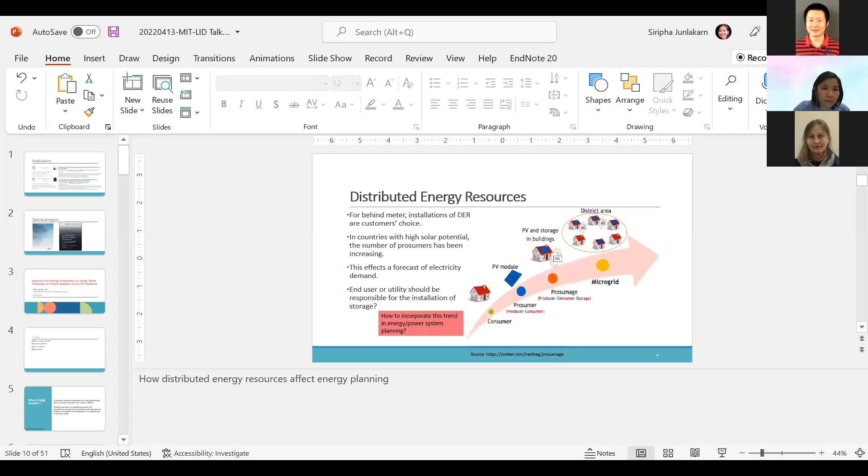So just to briefly introduce myself, my name is Siripha, and you can call me Pui. Like Thai people usually have a nickname, and Pui is my nickname. I'm a researcher at the Energy Research Institute at Chulalongkorn University. My focus right now is working on economics studies of solar PV, solar distributed PV, and how to support and promote using solar PV in Thailand, as we have high potential for solar. Most of our work here is about solar PV.

And also I'm interested in energy scenarios. I've worked with some projects, for example, economics and risk for the power system for the ASEAN grid. As our neighboring countries here, we have a project called the ASEAN power grid, trying to connect the ASEAN countries.

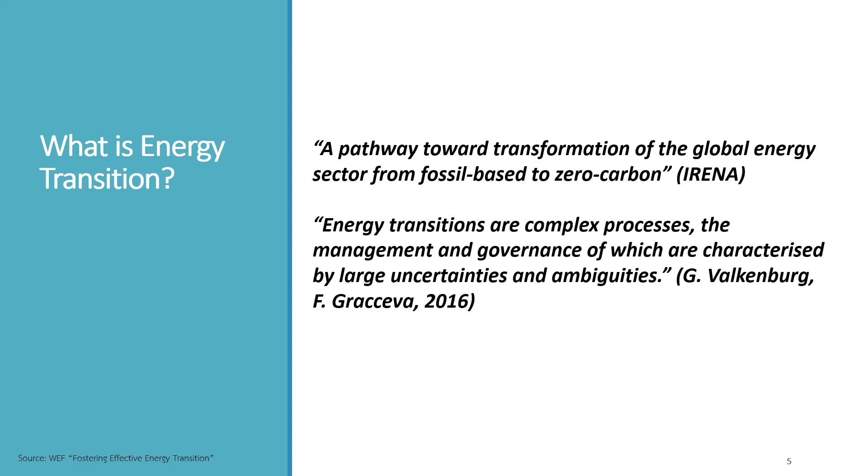So, what is energy transition? According to IRENA, energy transition is the pathway of transforming the energy sector from using fossil fuels to using more clean energy, which leads to reductions in carbon emissions. As energy transition is a process, it's complex since it's related to many sectors, so the management and governance of it are full of uncertainty and ambiguity.

So what are the drivers that bring about energy transition? The main drivers of energy transition are pollution from burning fossil fuels, and also climate change from greenhouse gas emissions. The energy sector is the main sector that contributes to that emission. The last driver is sustainable development.

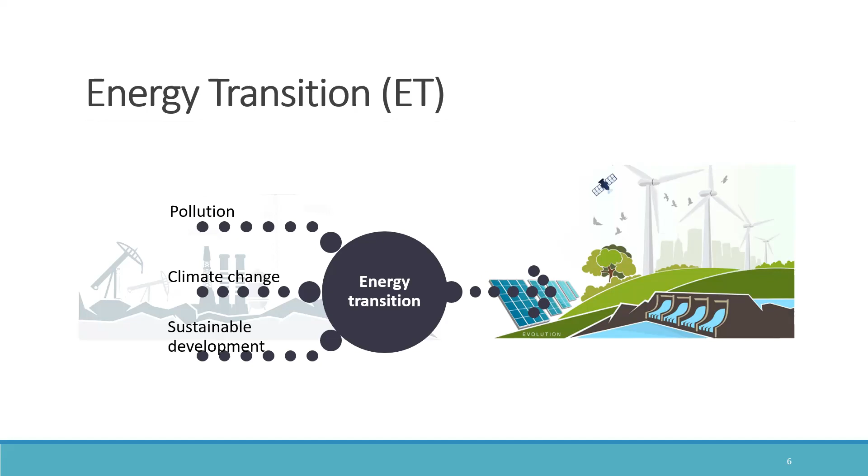As you know, we can't move to use more clean energy if this affects the economy of the country. So right now, I think another driver for Europe is the war between Ukraine and Russia. I think that factor might accelerate the transition in Europe to use more clean energy and phase out coal and maybe probably gas.

And when we talk about energy transition, each country has its own focus. For example, North America, as we reviewed in the report, is focused on energy affordability and equity, energy efficiency, decentralized systems, and energy storage.

But for China, the country will focus more on energy security, but especially air pollution, as they have a very severe problem with air pollution. So they try to use more clean energy.

Even for the Europe region, this region focuses more on coal and nuclear phase-out, as we reviewed in the report. And ASEAN here is focused more on energy efficiency, energy storage, and also decentralized systems as well.

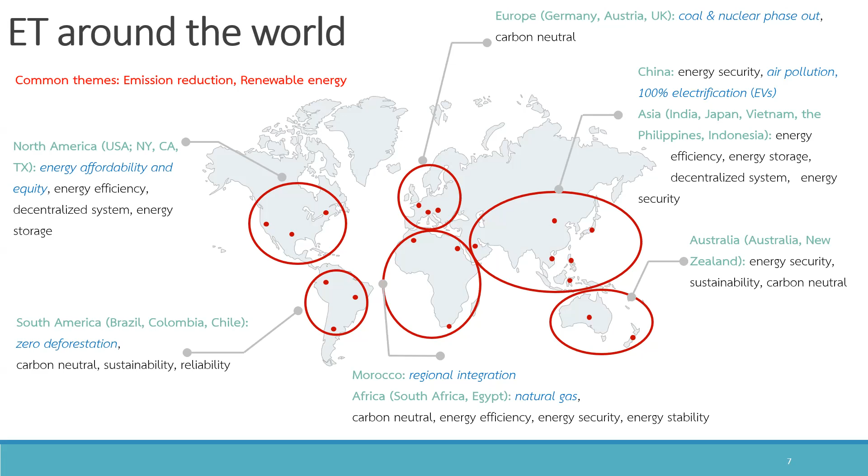It's kind of challenging to include this target when we think about energy planning as well.

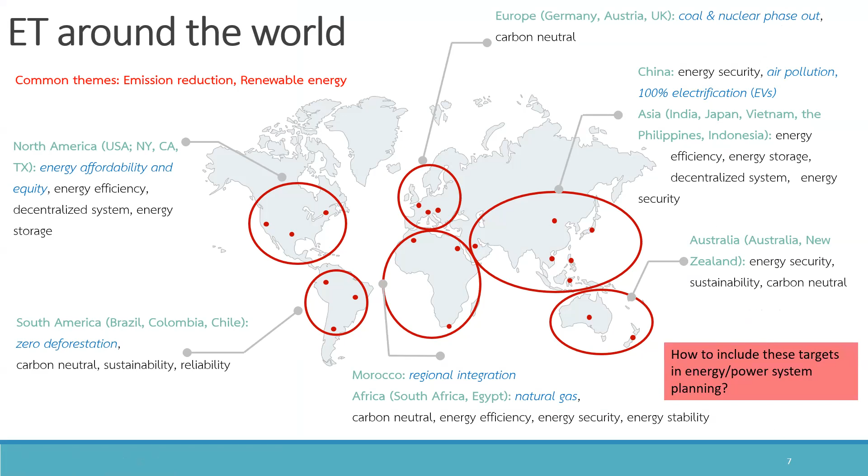That's why we come to this topic. As the energy transition, as I mentioned before, the energy system is complex and everyone needs to use energy, so they are at the heart of every country's economy. Energy will be used for the power sector, transport, and industry, and this brings in many different stakeholders that have to consume energy and electricity. This will have to balance between environmental sustainability, energy security, and economic growth. That's why it's like a goal of the United Nations, the sustainable development goals, also the climate change goal as well.

Next is about the enablers that will transform the power system. According to the WEF, World Economic Forum, there are three main enablers that will transform the power system. The first one is electrification in transportation and industry.

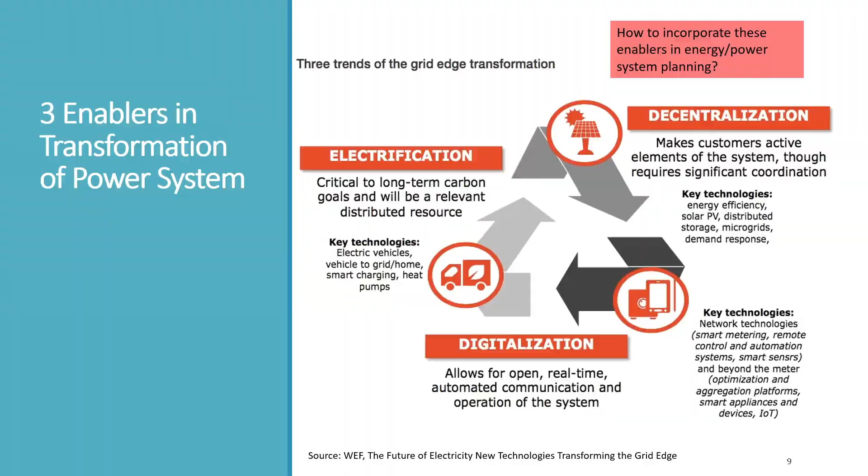Here, when we talk about distributed energy resources in the planning, how do we include the DER in the planning? It will be installed behind the meter as a customer choice. For example, in Thailand, as we have high potential of solar, many customers, even in industry, are increasingly installing solar PV for their self-consumption.

That's why when we do the planning, we don't see the load behind the meter, as we haven't installed smart meters to collect the data. So it's kind of difficult for the policymakers when they have to plan the expansion of generation and transmission, because they don't have this data so they can't forecast demand in the future. This affects the forecast of electricity demand.

Also, when we talk about storage, it comes with the question: where should we install the energy storage? Should it be the responsibility of the end user or the utility? Because the applications of energy storage vary, and it depends on the policy that we push, whether the cost will be borne by the end user, or it will be more optimal for the utility to install the energy storage.

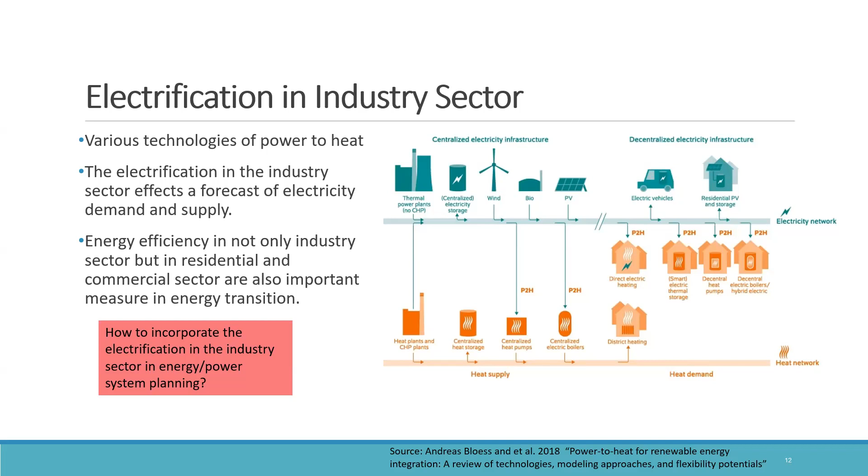Energy management and energy efficiency are not taken into account effectively when we do the planning, because data about the transformation from changes in technologies are not available, like how much each industry will change their equipment to use more heat pumps or other technologies that use more power.

Also for digitalization, as we've talked about the smart grid, using more communication to make the demand side more active and responsive to price, how to include this concept of the modernized grid in energy planning is not well established, as there's no data about how much energy efficiency can be reduced by using this digitalization technology. We will see more examples in the case of Thailand.

When we do the modeling of the energy planning, we need to consider what input we put in and what gaps still need to be addressed.

For shaping the energy transition, you can see that it's required to balance between the technology, socio-economics, and the politics. As for the power system, we might focus on balancing the resource and demand and the planning for the infrastructure.

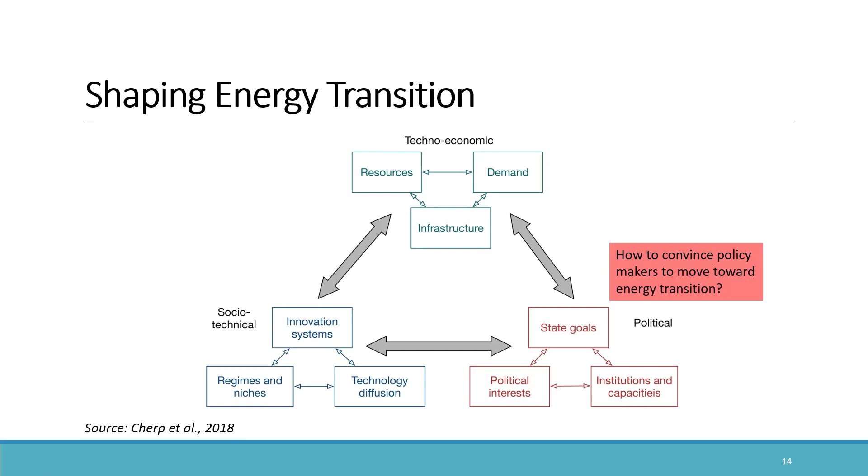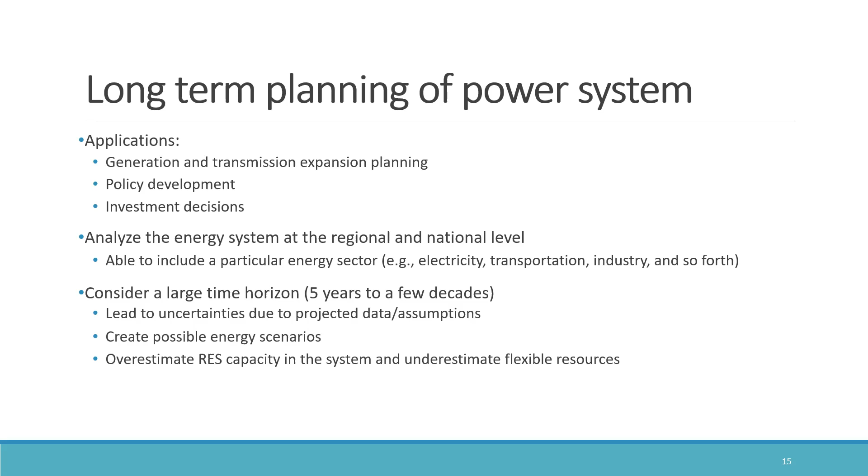So next is the case of Thailand. Just to give an overview, Thailand is a member of the Association of Southeast Asian Nations. The area of Thailand is almost the same as California, but the population is double that of California, and we have a market structure as a single buyer model. It's a regulated market, regulated by one utility that controls both generation and transmission.

Right now, last year our PM just joined COP26 and announced the target to decarbonize the energy system, not just the energy system, but to reduce greenhouse gas, setting a target for carbon neutrality by 2050 and net zero emissions by 2065. Basically this target still needs international support, and carbon neutrality focuses only on carbon emissions, while net zero focuses on all greenhouse gases.

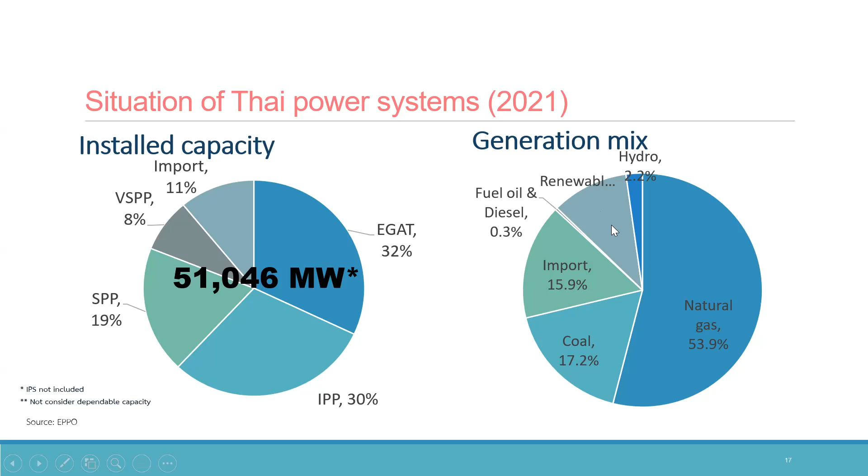Next, I will show you the case study of Thailand. This work is part of the program Clean, Affordable, and Secure Energy for Southeast Asia, funded by the German government. The project covers 4 countries: Indonesia, Philippines, Thailand, and Vietnam. Our institution is the local partner for Thailand.

We work with think tank companies from Germany, Agora and New Climate Institute, on this project. Basically, for the pathway of the Thai power system, we try to study how to transform and decarbonize the power system.

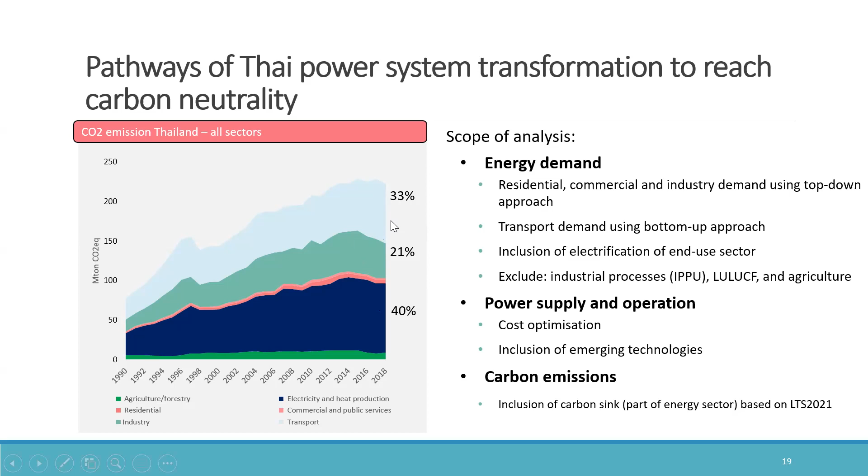The next sectors are industry and transport. That's why we consider these three sectors in our model.

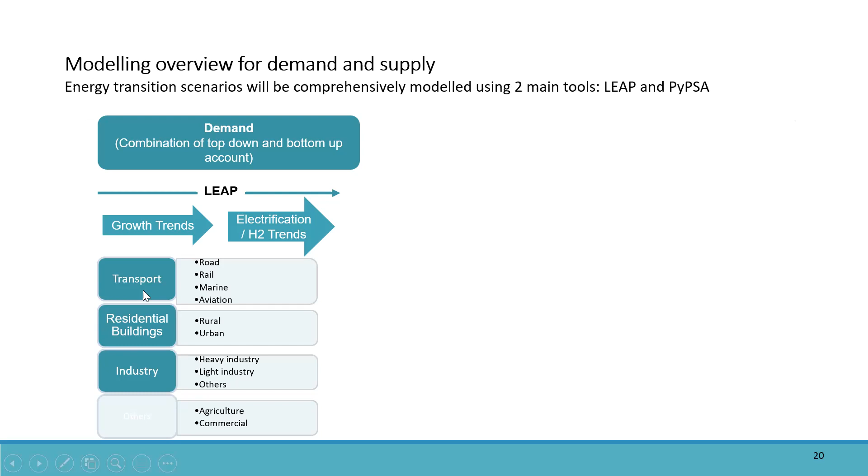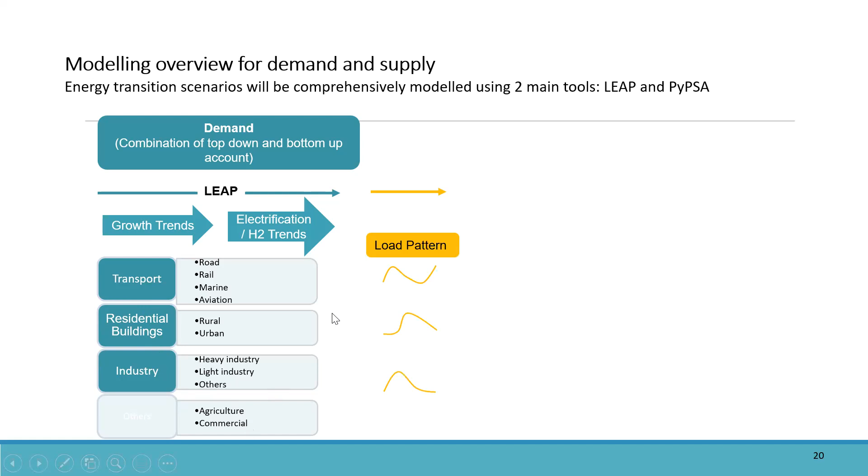Here we consider transport, residential, industrial, agriculture, and commercial sectors. This gives us the load pattern, which we use for optimization with PyPSA to do cost optimization, considering system operation like grid flexibility, which is not included in the demand side LEAP model. The scope of this work focuses only on generation and transmission, not the distribution system.

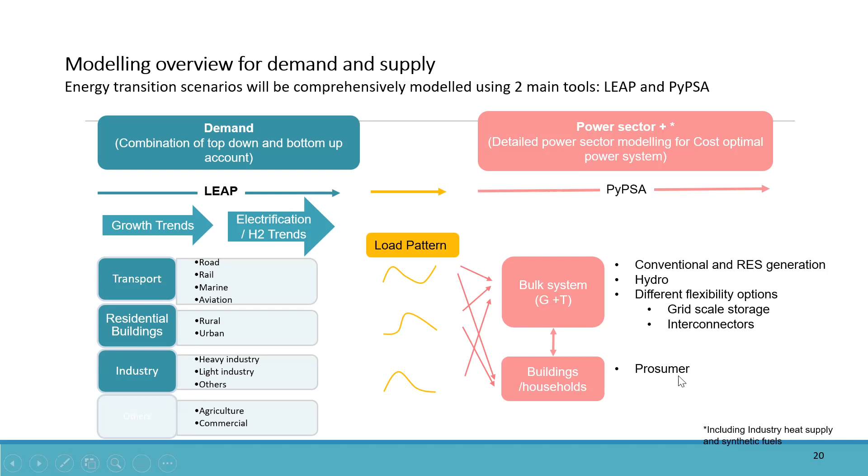We try to consider different flexibility options like storage and interconnectors. For buildings, we try to see what share of prosumers will be in the system.

When we do the modeling for the demand side, the measures we use in each sector translate into assumptions. For example, we go bottom-up, looking into different appliances like cooking, where the assumption is to switch to clean cooking to reduce used fuels like wood and charcoal. We put the assumption of what percentage each year will reduce.

For lighting, we assume a switch to 100% LED by 2025. For cooling, we assume energy intensity improvement of 30% by 2037 for air conditioners and refrigerators. This assumption is driven by technology, and we consider appliance by appliance, but have no data for the entire energy management system.

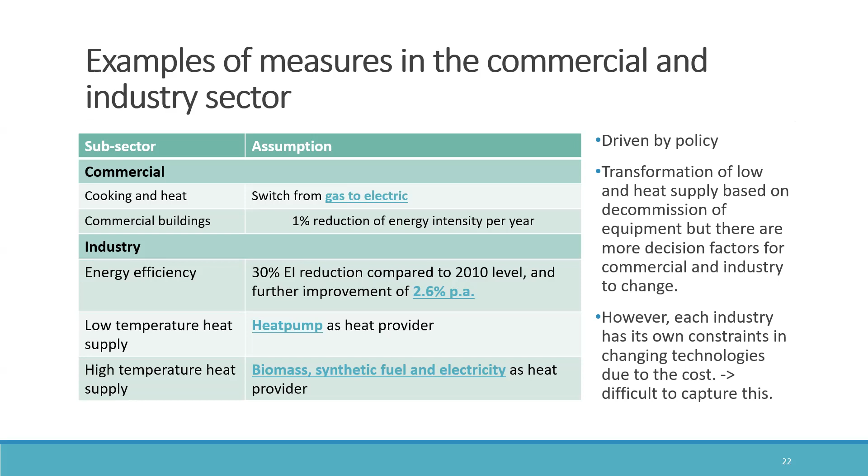That's why we do the commercial and industry sectors from the top down and put the energy intensity at 30% as in the previous slide, but the number here we just get from the policy maker - they aim to reduce it by 30%, but they have no detail on what they will do, just give us the number. So it's driven by the policy, and the transformations of low and high heat supply are based on the decommissioning of equipment as we put in the modeling. But there are more decision factors for the commercial and industrial chains, about the socio-technical aspects of how the technology is diffused or adopted. Each industry or commercial sector has its own constraints in changing technology due to cost, and it's difficult to capture this in the long-term energy modeling here.

So here is an assumption for the industry that we can pull out from the country. We just divide it by sector for the industry, and we have to divide it into high temperature and low temperature to see what technology we can use for electrification, like a heat pump for the low heat, and for the high heat we can maybe use other technology to supply heat.

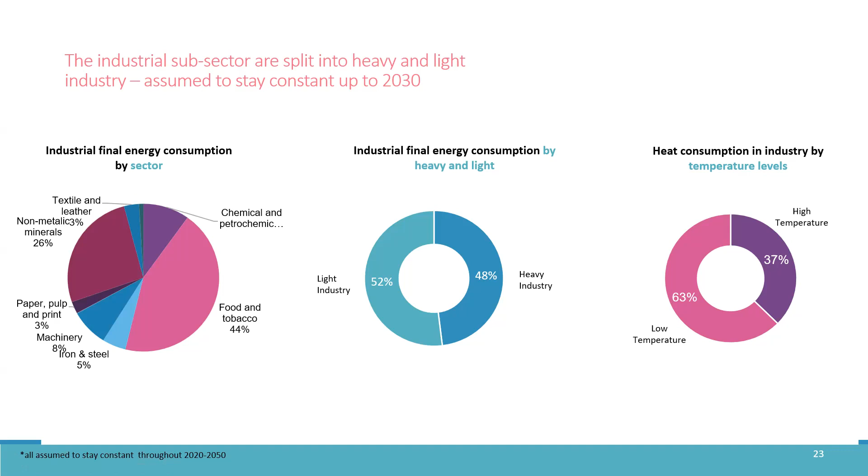This does not capture the customer behavior in adopting EV as well. So we're not sure how this will be the right measure of policy to move forward. But the transport sector will have their own plan of what they want to do, so it may not align with the energy system, which is challenging to include in the modeling.

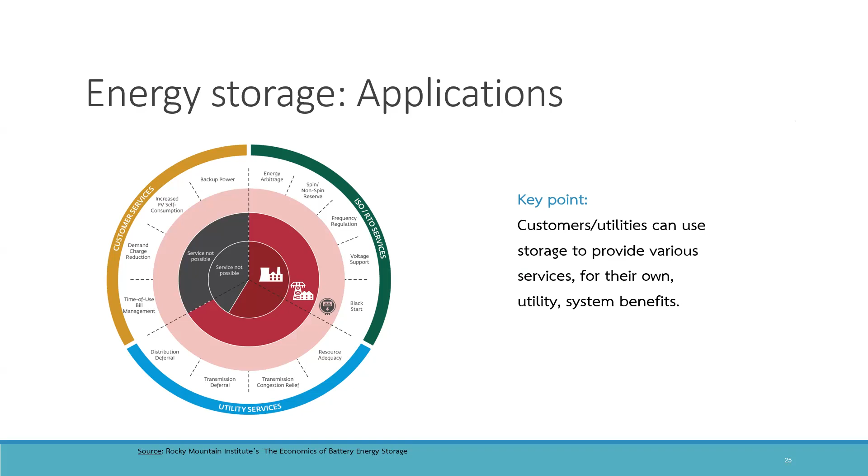For the prosumer, the number of prosumers will be driven by policy, or it depends on end-user decision factors as well. So it's not settled yet how to include this.

We should have a model that considers two ways: first, maybe driven by policy, where the policymaker sets the target already; or another model that considers socio-economic factors and technology diffusion, accounting for customer behavior to make the model more realistic in how customers will adopt solar PV.

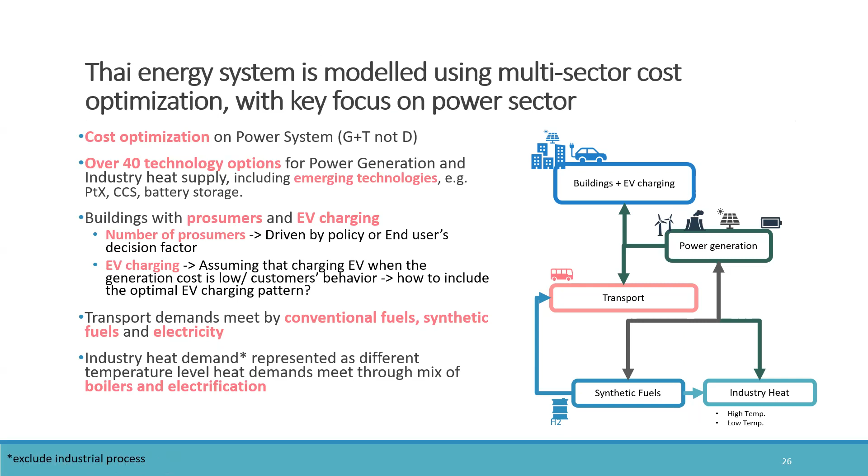Here is just the driver that enables people to install solar PV. If we do a separate model that forecasts the prosumer numbers and input that into the long-term energy model, it will help us see the effects of the prosumer from behind the meter better.

In the assumptions, we consider geography as we try to account for the expansion of the connectors, but also try to minimize computational running time. We just divided it by region into 5 nodes, but actually the transmission is more complicated than this. As a long-term model, we consider the hourly model with full year optimization.

We consider the long term until 2050. The resolution captures the load demand for each 5-year period, and each 5-year period has one full year optimization, an hourly model for the full year's optimization.

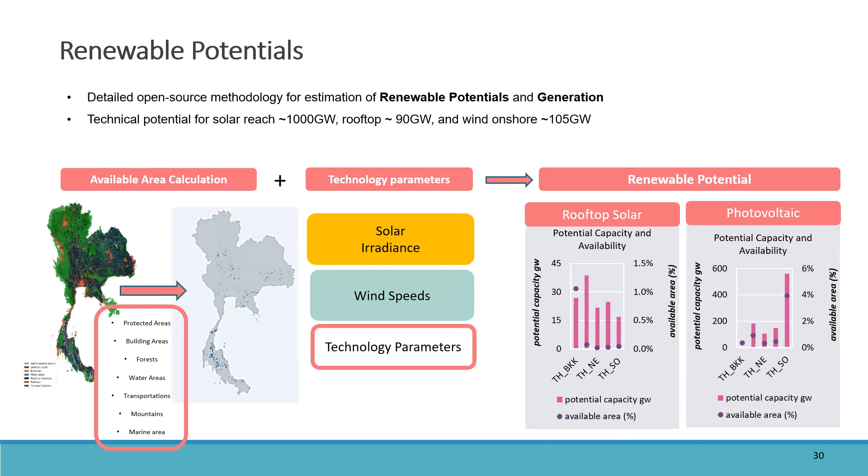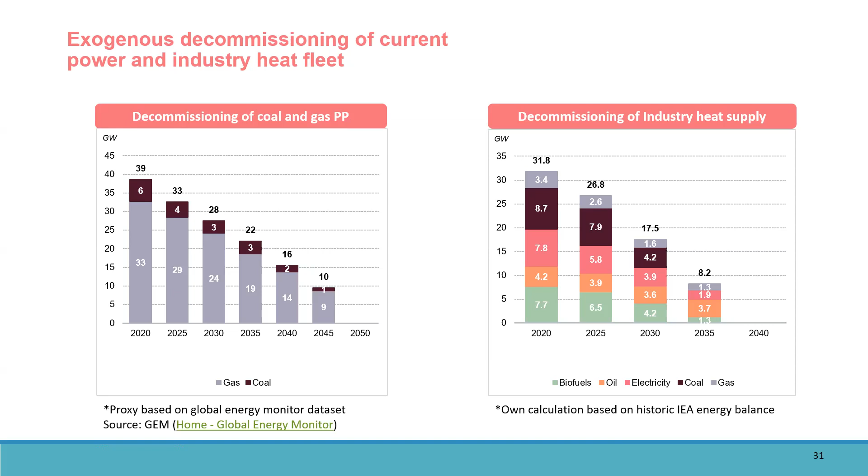In the model, we also consider the decommissions of coal and gas, but it's exogenous, like put what the assumption we think in the system, but we don't consider the possibility that the industry or socio-economics will change. So that's pretty much about the slide.

So for the key takeaway from this presentation, the energy transformation will lead to the change of the energy structure, and some energy supply and demand, distributed energy resources are shifted behind the meter, and there's a supply at the behind meter or demand side, so it makes the planning more complicated, as we don't know what the demand will change to.

And the electrification in the transport and industry sector will lead to complexity in estimating demand as well. And the measures related to energy efficiency and energy demand management are not included effectively in the long-term planning here.

So this is a gap that we still need a study to fill in, to promote energy management and energy efficiency, as it has a high potential to make the energy consumption more efficient.

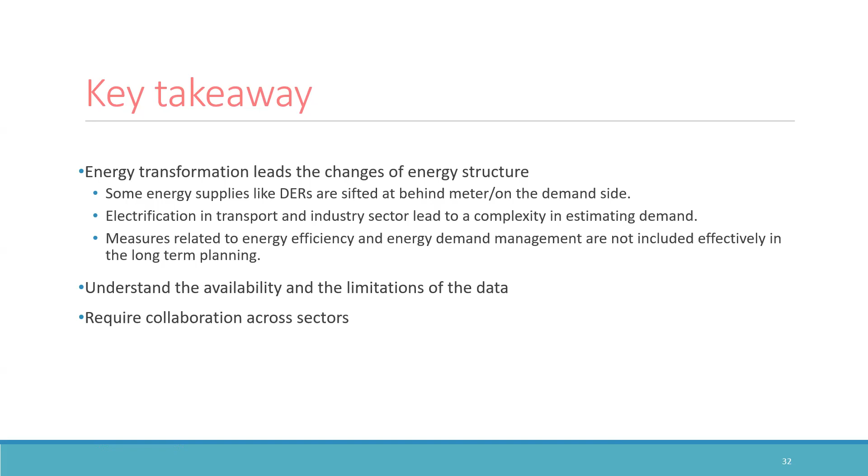Thank you. Thank you very much, Pui. I think this was a great travel through what we are trying to do, to some really systematic efforts in Thailand on projecting how different things would affect the outcomes.

And I can't help but say that the point about not having sufficient information, your last point about collaborators, different sectors collaborating, I think it's a fairly tricky thing, because people can provide their information and lose or win. You don't necessarily win if you provide the information.

So you might remember from our times even at CMU, we were promoting these dynamic monitoring and decision systems even for planning. That was part of your PhD thesis. I encourage people to look into that.

So the idea is that you really have to model in order to capture some of these effects and give incentives to different stakeholders to do better in terms of contributing to the social good. You would have to have some protocols on what information needs to be exchanged, at what economic value, technical performance, and so forth. So we have been working at MIT, half of our group, EESG, is still working on that. And I think the idea is very important.